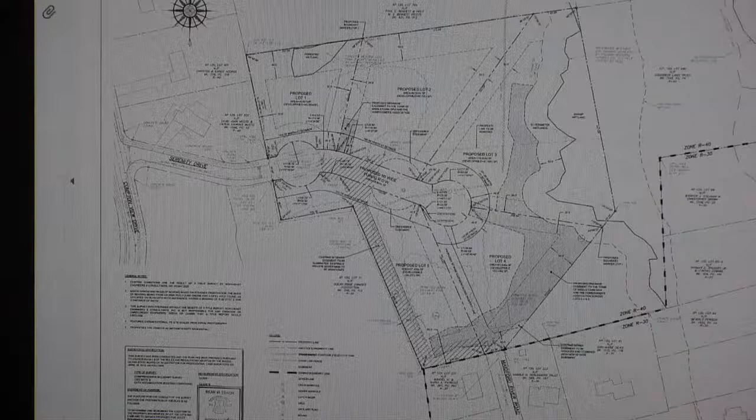Then we have a 200-foot setback, shown as the tighter dashed area east of the subdivision. Then it's probably about 100 feet to the property line, another 100 feet to the edge of the wetland, and another 50 feet to the edge of the perimeter wetland where the project actually starts. So it's pretty conservative to say we're about 400 to 450 feet away from the Maidford River.

And obviously you've taken that into account as part of the stormwater management design for the entire subdivision, correct? Correct.

In designing the stormwater management for the entire subdivision, you made certain assumptions regarding what the impervious area would be for each lot. Is that right? Correct. Can you just go through that analysis with the board?

So that we can try to provide a stormwater system that meets the overall development of the project while you don't have the final house designs for each of the 5 lots, the final layout for each of the 5 lots. Those would all be reviewed when they get their building permit under that process. But we do have to make an assumption on how much area those lots might be developed with.

For this project, we've allocated 3,000 square feet of impervious area for each of those lots. Now, that is usually the footprint. So that's a really large footprint because most houses are 2 stories. And that's impervious area, not decking or pervious patios or pools. It's, you know, if you want to put in a 1,500 square foot footprint and a driveway that's paved in 1,500 square feet, that would be impervious.

We do have the design calculations allocating 3,000 square feet of impervious area plus stone driveways. So there's some extra space in those stormwater calculations. When each homeowner goes to pull their building permit, we will be able to make sure that they comply with the overall drainage design for the project.

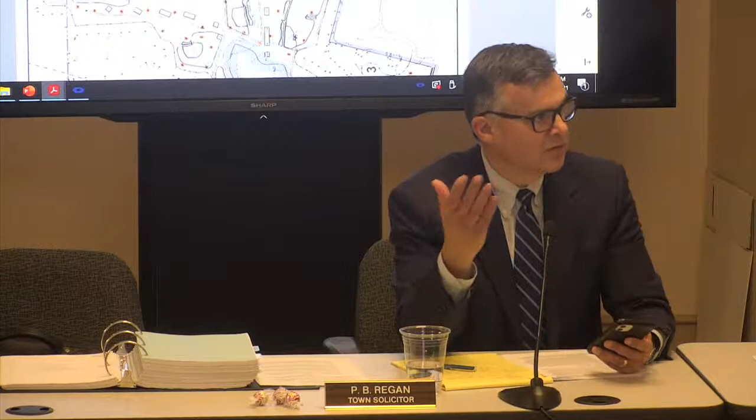If we just continue it to January 12th, we have to wait until then before we could assign a special meeting date. You can vet that date and hopefully confirm it in advance, but whatever special meeting you have would have to be after the 12th. In other words, you could confirm it's the 13th or the 15th or whatever date everyone's available, but it looks like it would have to be after the 12th in order to meet all the requirements.

So if I understand what the solicitor is suggesting, we put it over to the 12th for control purposes? Yeah, and then hopefully determine a date in the interim. That'll give Ron an opportunity to speak to everyone about an available date.

Well, perhaps another way around that is if we do it at a regular meeting and come in at 5 o'clock, adjust our time a little bit. I mean, that's not unusual, it's been done before.

Are you speaking for the board? Yeah, honestly we can deal with how we handle it between now and then. It's a good point, but now we should just continue it to the 12th.

I'm sorry, I didn't get that, Mr. Chairman. For now, we should continue this to the meeting of January 12th. And then the board, working with Ron, will arrive at a date to address this project, whether it's earlier in the evening of the 12th or some other date. We'll get it done as quickly as we can.

Well, I think as a matter of public notice, if you're going to meet earlier than 6 o'clock, that has to be decided tonight. So the public will hear that.

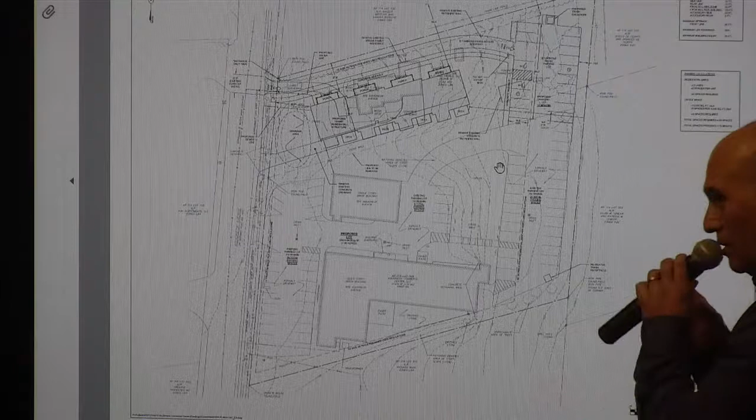Is it working? Yes, it is. Okay, thank you. I think so. Should I sing or no?

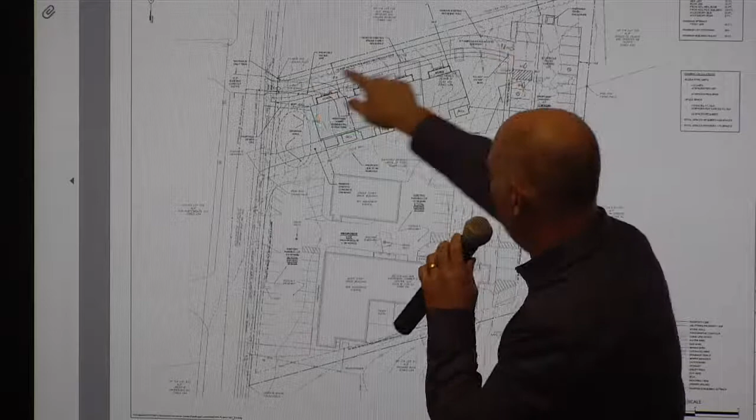So developing the site, we have a lot of issues with Aquidneck Ave, so we felt eliminating the southernmost access point would be beneficial, and having a one-way northern access point. In doing so, the road does encroach on the 20-foot buffer, leaving 5 feet the way it's designed today. So we have a 5-foot vegetated buffer where we'll plant giant arborvitaes, which will come through the landscape plan we'll present during TRC. In addition, we've sent an email to the abutter saying we're more than willing to put a 6-foot wooden fence along there in addition to the vegetation buffer.

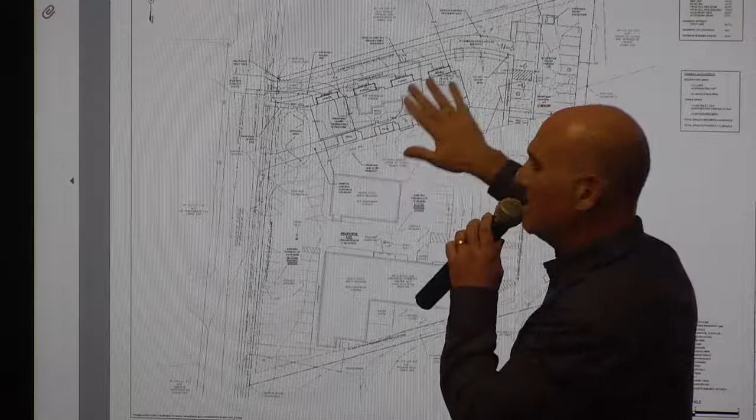This road, the building is angled this way for a very specific reason - because we have a large grove of pine trees right here and a stone wall going this way. So we've used the natural contours of the lot to achieve the site plan. That does put us approximately 63 feet from the nearest residential/business unit. It is a residential use, so we are mindful of that, and that's the second variance. The third variance, the height, is just - the building is never more than 35 feet above the topsoil.

The only reason it rises to 39 feet is because of the slope of the land and the way the calculation's done. But the building itself is never more than 35 feet above the ground. So it's just a result of the slope, not a result of us designing the building higher than 35 feet. So when we looked at the alternatives, we can move the building this way and be 100 feet away from the residential unit, sliding the road this way.

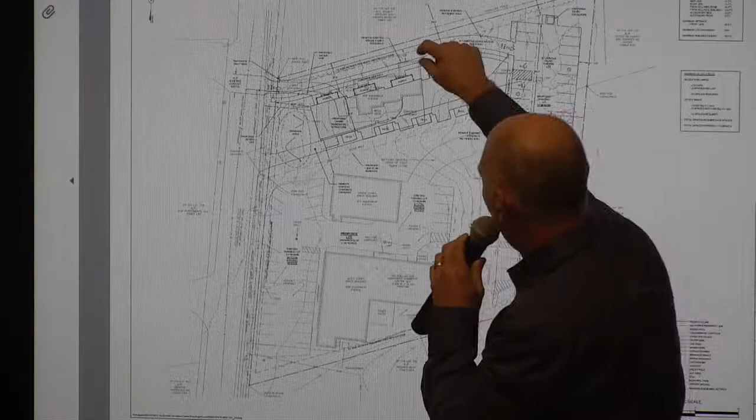What will happen is we lose the stone wall. It does not face the public right of way, so we'll have to replace it somewhere. We'll find a place for it. We lose all the tree lines, and we'd lose this second access. Right now there's a loop in the property, and the fire department felt that was a good solution so they could get up this way and down this way. By widening this road, it would be in and out, but we'd lose the loop transportation system we have.

If we move the building this way, we'll be 100 feet away, closer to this building, and we can move the road that way, so that is feasible. The height variance is the one thing that's impossible to really construct without elongating the building and losing its dimensions because of the slope. We'd have to excavate and make it — that's where we are on the site. So that's the three variances.

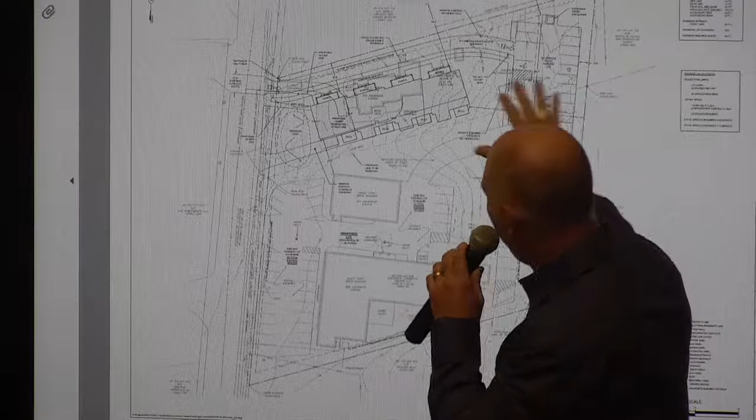It seems to me if you move the building to achieve the 100-foot separation, you could still establish that circular flow that TRC likes. Well, I don't know, and I don't believe we will. If we even come this way a little bit more, I don't think we get the 100 feet, Chairman. I think we'd have to tilt the building all the way so it's almost perpendicular to achieve the 100 feet. We might get 80 feet, 79, maybe 90, but we'd still need a variance. We can get 100 if we just move it this way and be compliant without a variance.

And then we have to slide the road over, because we need it positioned to get it far enough behind, but still have a walkway in — we need to get people into the building. So we'd really have to slide it over and lose this circular path.

Thank you. Comments or questions?

Chris, as long as you want to speak to the issue of the flat roof on the building. Sure, I know, Chairman, how you feel about flat roofs. We were going for a design that kind of worked more as a campus. A campus — do we have a picture of the building?

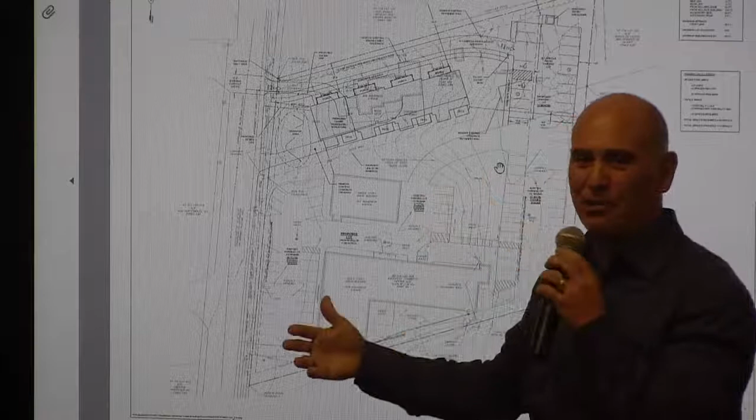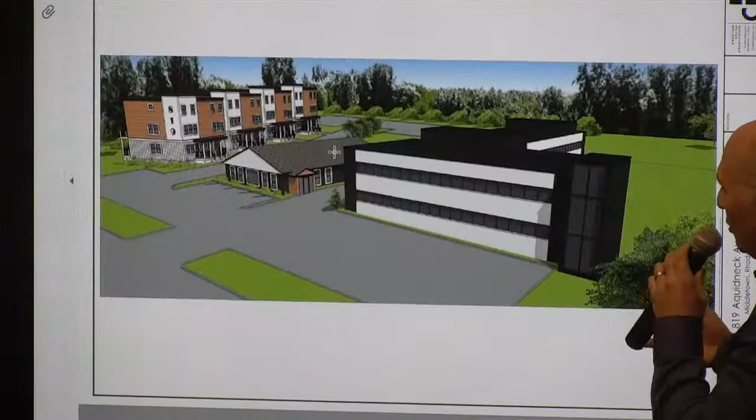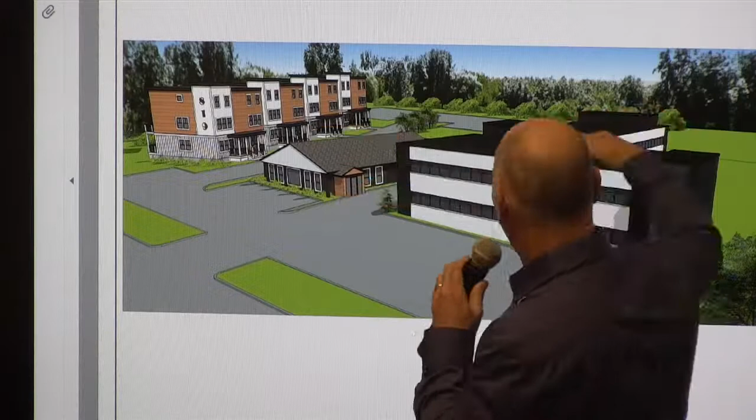So most importantly, even if you bear with us and allow the flat roof situation, there will be no mechanicals on the flat roof. The flat roof kind of fits with the way the buildings are positioned and the way the landscaping works. We were looking for more of a contemporary coastal feel, trying to fit the commercial atmosphere of Aquidneck Ave, really trying to present that campus feel. It's really a personal opinion kind of selection. I do understand where you're coming from — we just felt it really looks nice laid out. That's personal preference, I guess.

Are you going to change the colors of the siding on that commercial building on the right? This has already been changed — I don't know if you've driven by. We've changed it to a dovetail gray, so the white's gone and it's all been changed. The siding's all been put on the building if you drive by. It looks really nice. You don't have the most recent drawings up here, Ron, but we have new drawings of the updated siding and everything.

The same color as the siding on the apartment building? Yes, exactly, so it all looks the same. It's actually not this red — it's a little more, it's already been done, a matter of fact, if you drive by. So this has all been completed, and then all this would match together.

Other comments or questions? Bill? Question, yeah, thanks. Ron, as I read your memo, he talked about zoning relief.

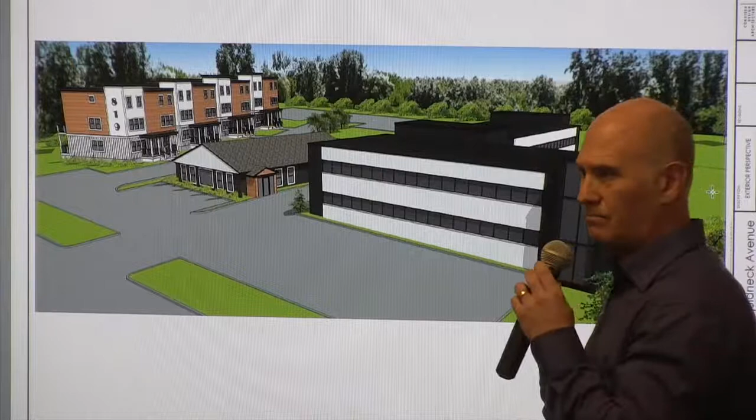If we have to go to the 100 feet, we have to put the stone wall down. Understood. So if I want to support keeping the stone wall and give you the 62 feet, my question is: has the fire department acknowledged there's going to be a stone wall potentially hindering their access there? Oh no, the stone wall's already here, it doesn't impede their access at all.

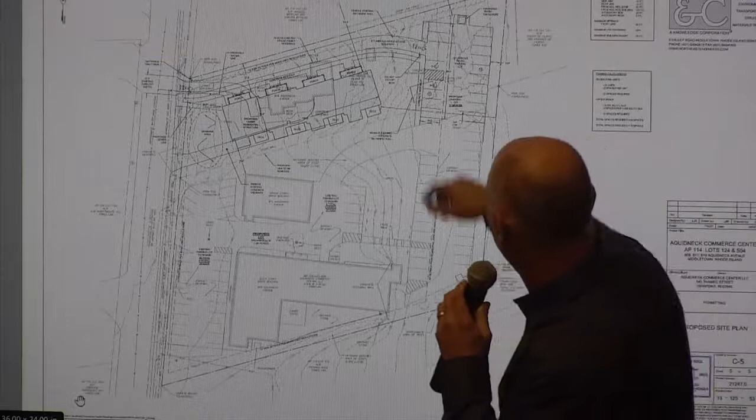I understand that, but along the back side of that property, if they needed to get a vehicle in there... Oh, there's no stone wall back here. No, I know. I'm talking about behind the building on the south side. Yes, right here, they're aware of it. That's close to the structure, and typically if the fire department needs to get access there, that stone wall potentially could hinder access for fire.

So I just want to be clear: we've reviewed this site plan during roads and utilities, and the fire department was there. Their one comment was they've asked us to just remove a space over here so they can turn. Okay, okay, okay.

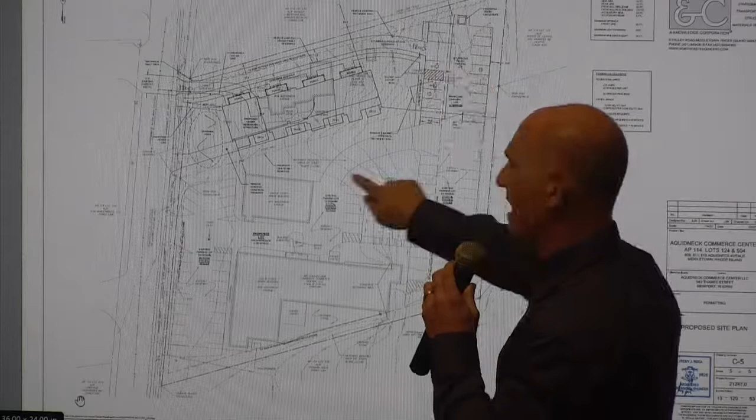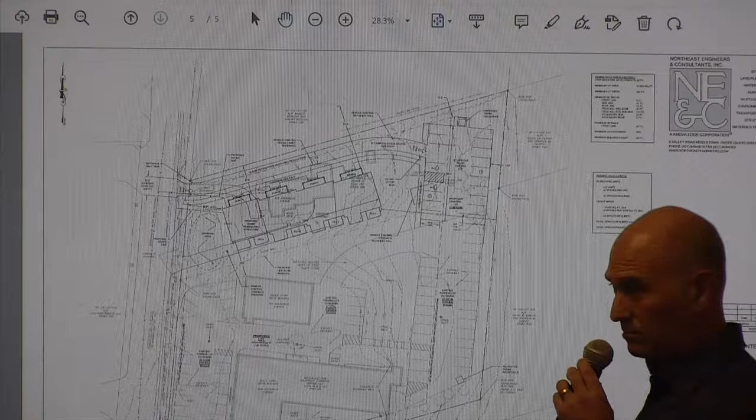What is the building that is 62 feet from your building? This building right here. Yeah, but what is that building? That is a single-family home. It's a single-family home with a business too, a landscaping business. There's a single-family home there that also incorporates a landscaping business at the site. It's not purely single-family.

Other comments or questions about the waiver? Mike and then Art. So on the north end there, where you have that 5-foot buffer, what is that? We have the way the road's laid out at 5 feet, and then there'll be a landscape and a wooden fence that goes all the way up. So I'm looking at these architectural drawings, it looks like maybe a tall hedge or some arborvitae's. Yeah, the arborvitae's, correct, giant arborvitae's, they'll grow somewhere around 15 to 20 feet high, pretty fast growing.

Well, I think, if you're going uphill, what are you going to do? I think we're at like 161 and it goes all the way down to 140. But the building itself never goes above 35 feet. It's clearly just a slope.

Do we need to go through these potential waiver requests one by one? You can go through them one by one if you want. But before you do that, I have another question. Your perspective drawings show windows on the ends of the buildings, but your plan drawings do not show the windows on the ends. What is your...

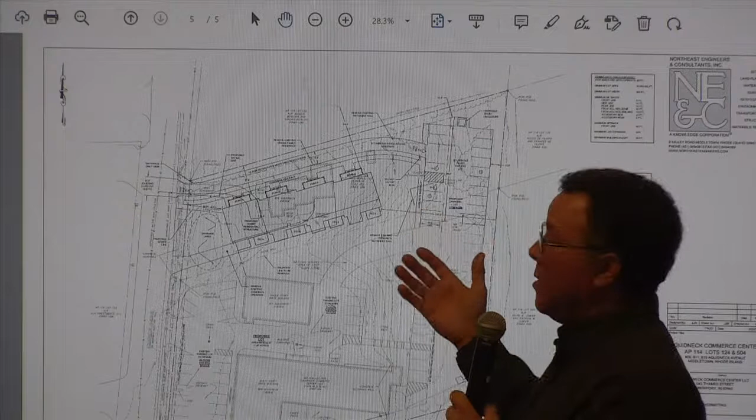We do have grandkids that play back there, so my issue is, even though it's a one-way, you'll have trucks, UPS, FedEx and all them in and out. They don't drive like 5, 10 miles an hour when they're in this zone. So I'm worried about cars leaving the property or coming in, sliding into our property on a snowy day or something. If somebody's not paying attention, it's only a 5-foot buffer. A 20-foot driveway in the buffer doesn't make sense to me.

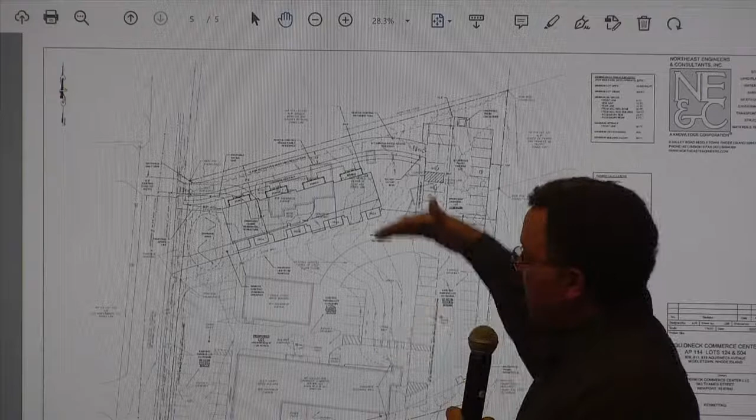I think Chris is trying to, in some way, alleviate this by making a greater distance, which, hey, I'll be all for it. But we do have concerns because we use that side of our property for our own use.

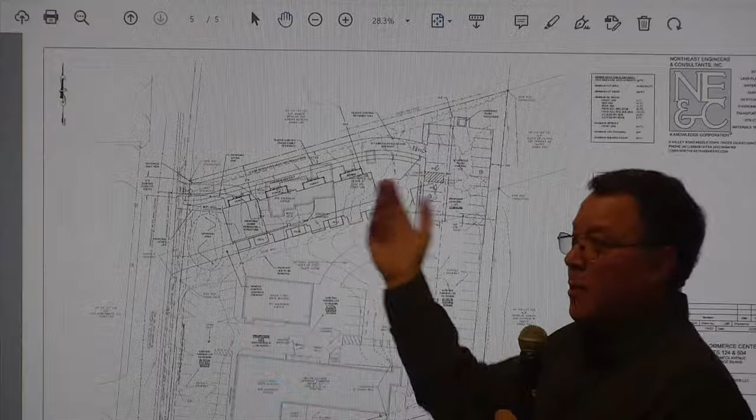Your concern is that some of those vehicles might encroach on your property? Well, it's not the encroaching, it's if they're coming around — I don't know which way this is coming up, but it's always something on Aquidneck Ave. I brought it up once before, but vehicles run off the road, pulling up into a parking lot from across the street. So yes, it makes me very nervous. This is 5 feet from my property, not 50 feet from my property. And it's a big concern.

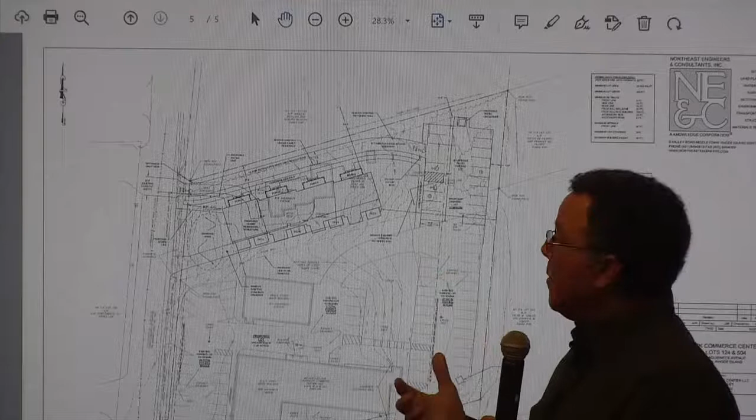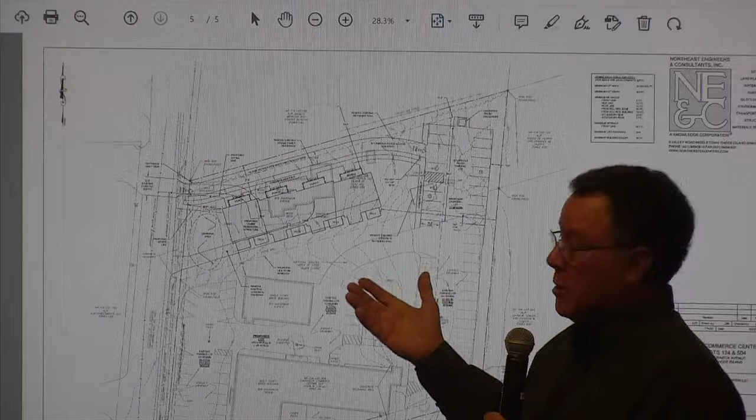I think Chris, like I said, was trying to give it some other way of making it work. If you can make it work, great. The distance, you can push that road over a little bit, great. But this is just, to me, too close. And then that 5-foot buffer, at some point, maybe it doesn't work on the plan. Does it become smaller? Does it become 2 feet? It's supposed to be 20 feet, but you got a road in it — that's not really a buffer as far as I'm concerned. So ultimately, I think he was trying to give some other way of making this work, which we get, and I understand it. I just don't want the road so close. I'm calling it a road, you guys call it a driveway, but 18 feet wide and over 150 feet long — most driveways aren't that long, unless you live out in the country somewhere.

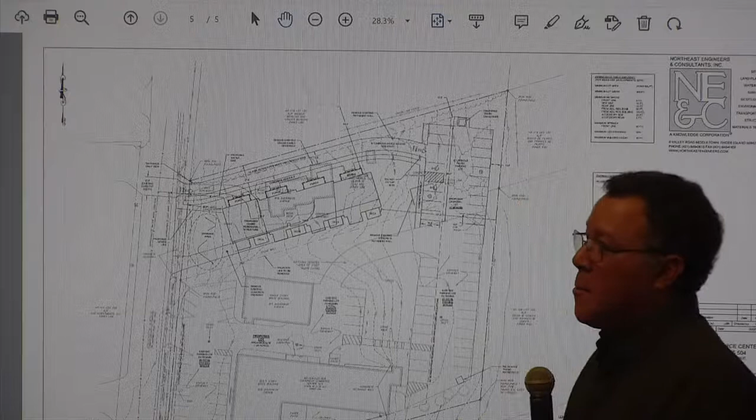BJ, do you have a question? Yes, I have a question for you. Do you have any fencing along that side of your property? I have fencing that goes all the way — chain link, on this side of the property. What kind of fencing? Chain link. How tall? 6 foot. That meets code for the pool.

So the pool is that close? Pool is approximately maybe 15 feet away from that fence. And mind you, the fence is, depending on the area, could be 4 to 6 feet from the property line.

Would any shrubs or vegetation help you at all put along that side of the fence? I know, he's planning on it, but the problem is we put it kind of small right now. So take a truck, snap a pole in half, put vegetation.

I'm not complaining about the vegetation he wants to put in. I'm just complaining about the road that's going in. It's too close to the property line. The buffer ultimately is 5 feet now. You put a road in it, it's no longer a buffer.

What do you think of the project? Get rid of the house, it's great, you know what I mean? What he's doing is really good. I'm not complaining about what he's doing as far as the project goes. I'm just complaining about the road being so close.

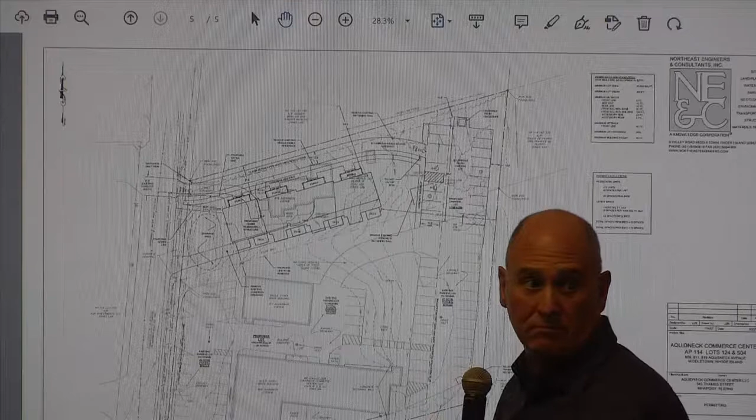Absolutely. Would that work? To stop the cars from coming into our yard, for protection, if it stops vehicles, because our kids play back there, we just put bollards in there, that's all. Yeah, that's fine. Could you do that? Oh yeah, that's not a problem. That would be great.

We also had a question, because we have a well in our backyard, and drainage was going on too, so I didn't know if that would affect our well with the building. That should have been addressed, shouldn't it? I think Lynn, the engineer, can speak to that. Let's hear about surface water.

Could I just ask a question? Just so we can get this clear, is it a 10-foot buffer with bollards, or a 15-foot buffer with bollards, or do you want the full 20 feet, or 10 or 15? We want as far away as we can get. Okay, so we'll just do 20 and not ask for the variance at the end of the day.

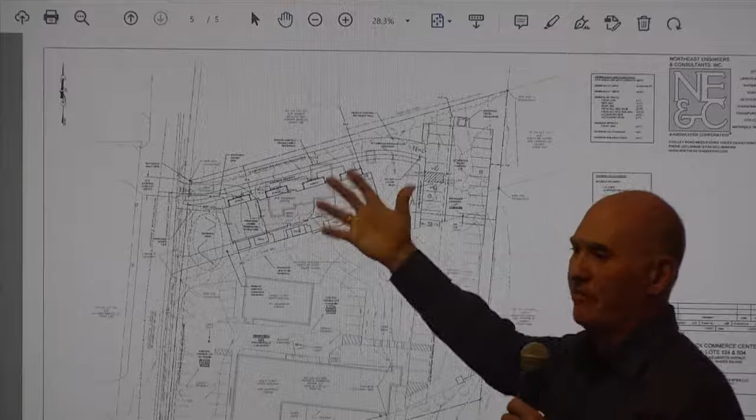Then we'll lose the stone wall. Then we'll lose the stone wall and the trees. We'll still have to reorient the building in order to move that, and you'll have to relocate the stone wall. Yeah, we will have to relocate the stone wall.

So what happens then to the circular traffic pattern? That would have to go away. There's just no way we can move this way without ending up all the way over here if we get 20 feet off here. So if we can move it that way, we will.

We'll have to have Chris do a 10-foot buffer though. Yeah, still keep the basic. Well, 10 feet, we can just slide this over 10 feet. We have 22 feet between the corner. And you'd still lose the wall. We're still going to lose the wall against it.

So here the question would be, you're asking him to relocate the wall. No, if he has to move the wall because of a condition we impose or a requirement, if there's a wall on the property, he's bound by our regulations to relocate it somewhere on that property. So just asking, could he relocate it between the two properties?

That's kind of where I was going to go. That's an idea. I mean, that's almost like a car barrier in itself. That's where I was going to go with you.

Yeah, that's an idea. The other thing I wanted to ask Chris is, currently the way the plan is, the road as it exists on the plan I'm looking at, how far is it away from the property line now? Looks like 5 feet, right?

So that's a concern, and I happen to agree. I think that's close. I think 10 feet is reasonable. If you can get him 10 feet and put that wall over there, to me it's a win-win for everybody here. 10 feet buffer, not 5.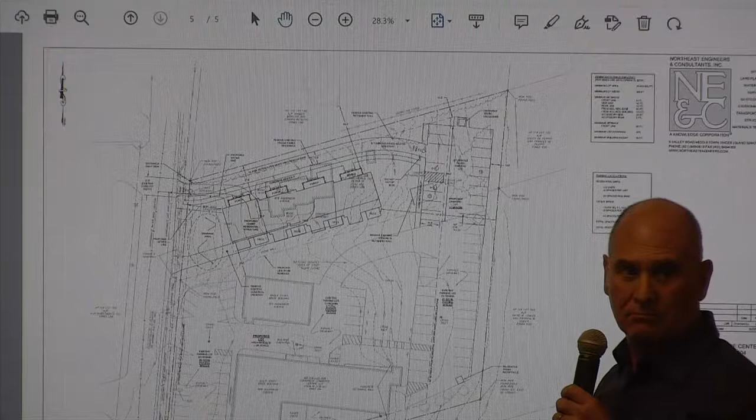No, but they don't have to put a speed bump in, because if they're out there plowing. You're a plower. I don't want to hear it. You're a plower, you know what I mean, like 2 o'clock in the morning.

Let me ask a question. Given that the applicant is willing to make some changes, would this have to come back for review again? The best thing here would be to continue this to the next meeting, and in the meantime you could talk to each other.

Get approval just contingent on us having a 10-foot buffer? Where was that?

Well, technically, the relief that has been requested and advertised is for 5 foot. So if you're now asking for less relief because you're providing a 10-foot buffer, then from a legal standpoint it doesn't need to be re-advertised or re-noticed. The question is whether the board is comfortable enough with what the reconfiguration is going to look like to be able to proceed to make a decision. So then that's really up to the board.

Sounds good, yeah, I'm good. I think the board is fine with the configuration, so long as we can capture it in writing somehow. And the only other thing would be, in terms of conditions, because you do have the right to put conditions on any zoning variances you're granting, if there's going to be any reconfiguration of the road, one condition might be that there'd be another review by the fire department to make sure they're sure.

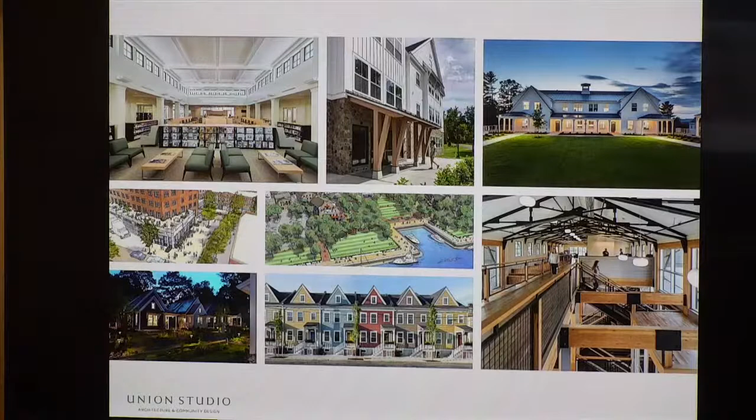Union Studio was established with one overriding goal: to use our skills as architects and urban designers to make a civic contribution to all communities of all types. What that means is we're very mission-based, really dedicated to enrich lives and strengthen communities. Whether it's affordable housing, planning, good developer housing, the Tiverton Library up on the upper left-hand side, student housing, and even on the lower right, WaterRower headquarters in Warren, which is a corporate headquarters. So whatever project comes through the door, we put the community, our clients, and people first.

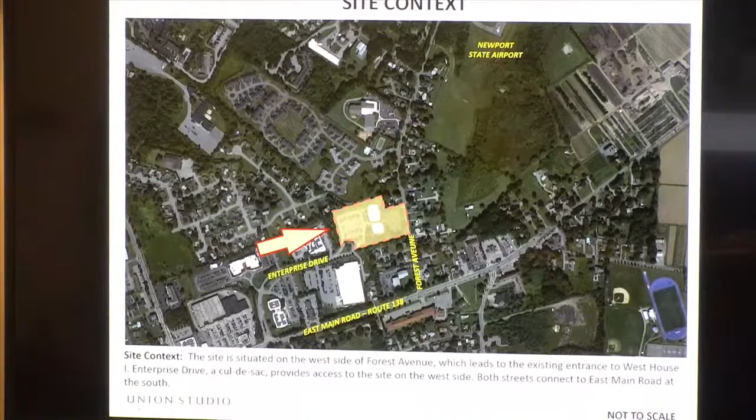I'd like to go through the existing conditions briefly. You probably know the site very well, it's a couple hundred yards behind your backs, on the end of Enterprise Drive on the west side, and the frontage is on Forest Avenue on the east side. It's a large parcel, and as Mr. Belden mentioned earlier, it was developed years ago as part of an office park, and in the late 90s the existing building was converted into elderly affordable housing.

Looking specifically at the site, the frontage along Forest Avenue is the main entrance to the existing building, with a parking field in front of the front door on the east side. On the west side is a large parking lot that was considered for office use, and Mr. Belden has confirmed there's very little parking used by the residents currently at West House 1.

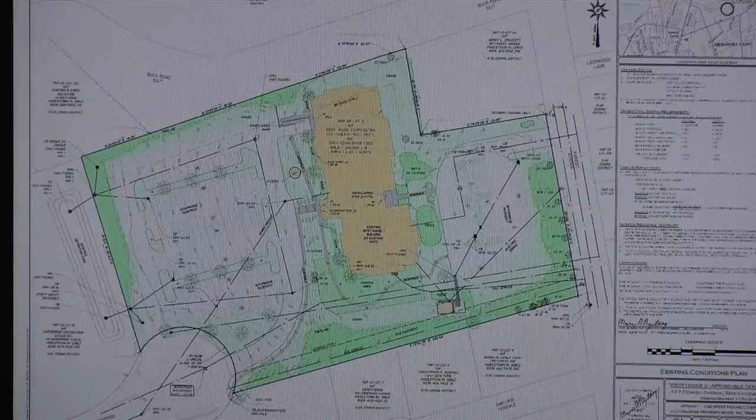What I'd like to point out, which is hard to see from this slide, is that the east part of the site is much higher in grade than the western side. From the west facade of the existing building, it's a steady slope down away from the building toward Enterprise Drive. That's significant architecturally, because the finished floor level of the existing building needs to be considered for this addition and for connecting interior circulation from the existing building to the new addition. It's not really a building, it's technically an addition.

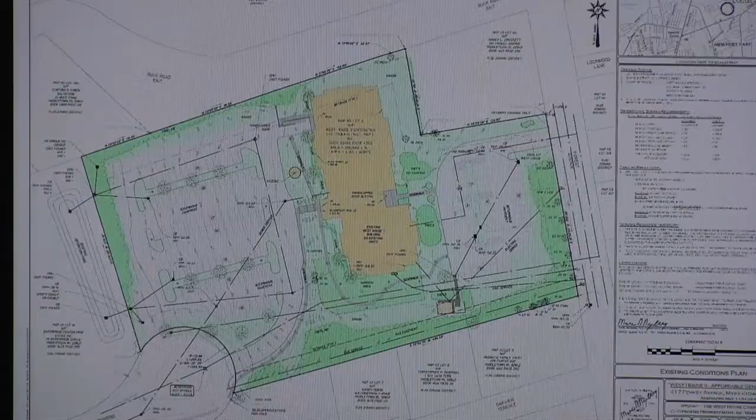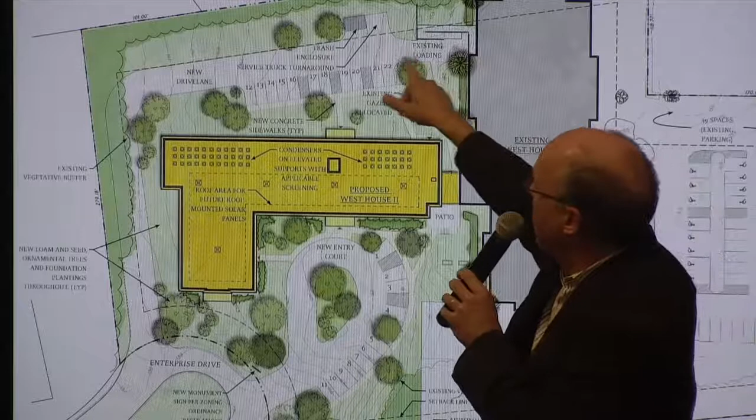We played around with a lot of configurations, and this direct east-west access was determined to be most suitable for the parking and site circulation, but also to provide unobstructed views for the existing residents toward the west. Because of the sloping site, this building is set down lower than the existing building.

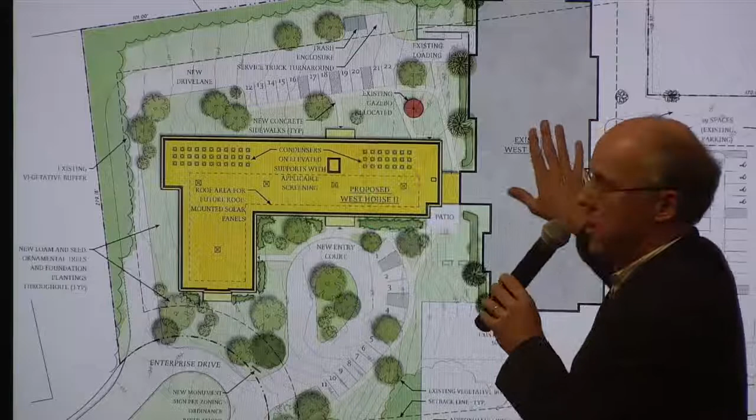Our civil engineer will go through some more details of the site planning. Next, please.

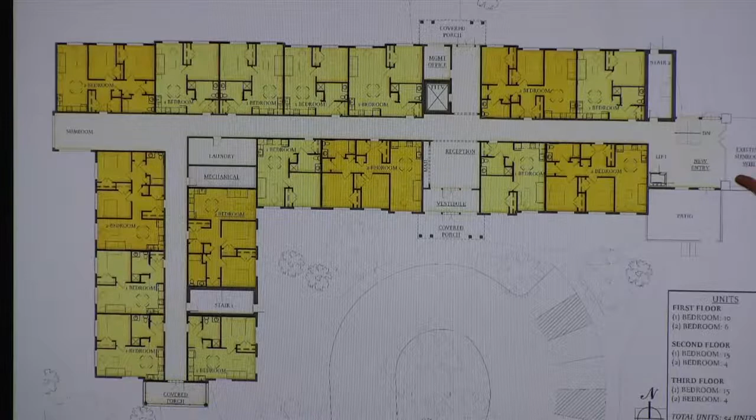There's an existing sunroom on the first floor that we will be connecting to with a new entrance and a south patio to provide some nice southern exposure seating outside. That's connected to an existing garden up high on the south side of the existing building. But then that is our transition area, where we have steps down about 5.5 feet from the existing finished floor elevation down to the first floor elevation of the new building.

Next, please. Not much to add on the second and third floor plans. And then I'd like to jump to the elevations, the proposed elevations.

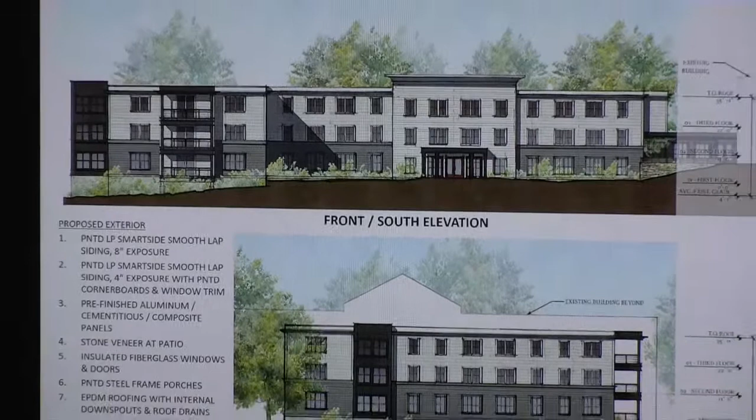It is a flat roof. There's a few reasons for that, as I mentioned before. One is to minimize the obstruction of views to the west toward the Newport Bridge, or the Claiborne Pell Bridge now. I still can't help it, it's still Newport Bridge to me. The flat roof will also have some condensing units, as well as a future solar array to help provide power to the new addition.

I know there's been some comments about why isn't there a pitched roof. As you can see, there's a little bit of a pitched roof on the existing part of the building beyond, but that was an addition made when it was converted to housing, to create a central atrium to bring light into the front entry foyer. Also, there's a 2-story manager's apartment, so they have the benefit of a top story for a bedroom there. So it's only a little part of that building, designed as an architectural element to provide sunlight to the main foyer.

So can I ask a quick question? Yeah, please. Where do you hide the heating and cooling stuff?

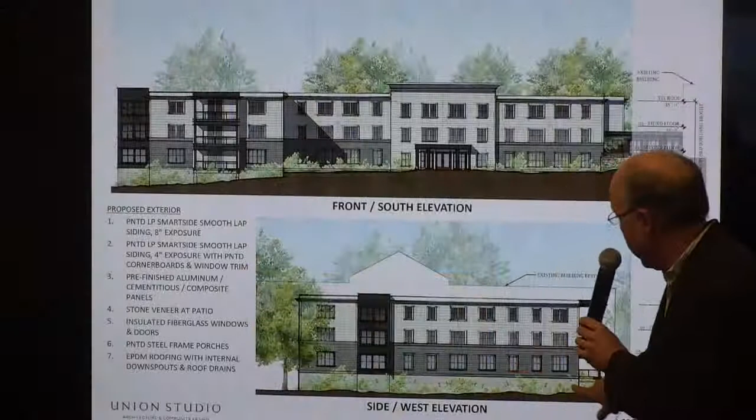Well, we are proposing, which is not in your plans but we've developed a bit more, a partial basement. So a lot of the mechanical and electrical will be in the basement. If this is the west elevation, facing Enterprise Drive, this is now sort of a walkout basement, and our basement access will be on that side.

Okay, thanks. Next, please. This here's the north elevation, very similar to the south elevation. Next.

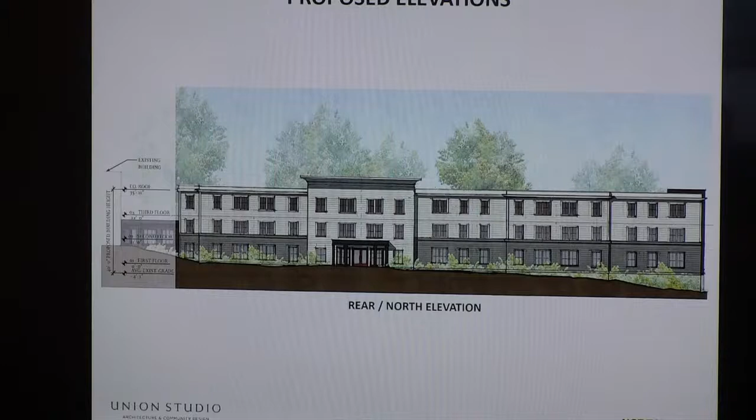We are proposing some very traditional type materials. The siding is a cementitious or composite siding, which is to mimic clapboard siding, but it'll be painted. It's very useful in terms of maintenance and cost, easy to maintain, easy to paint, and it looks very traditional. We have some painted steel frame porches for the front entry area and the porch on the south side of the L wing, and we're proposing some stone veneer on that raised patio.

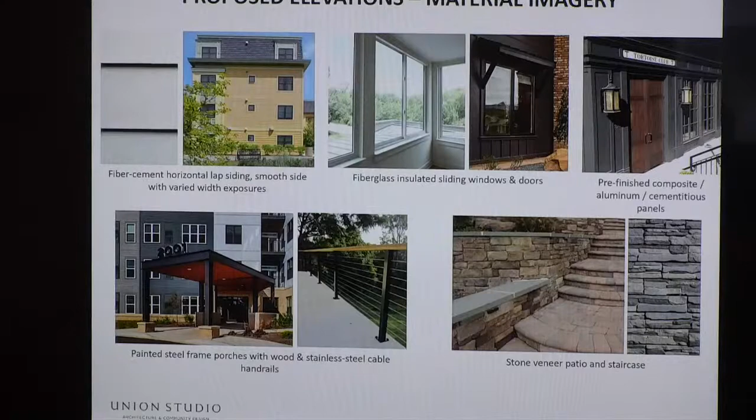Nothing out of the ordinary. Well, I could add that - I'm sorry? If I see another flat roof, I think I'm going to jump off it.

But we have been fighting a battle here for about 100 years to make things look somewhat interesting and like it's New England. And I always encourage, if there's any wiggle room to make it look unflat or a little bit different, a little gable or something like that, I personally would appreciate it, and I think everybody else would, because quite frankly, when you look at a flat building, it could be a prison. I think it could be more interesting if we got some kind of a roof variation. I'm not sure what it might be, because I'm not an architect, but I'm just hoping maybe that we can do something that's a little bit more interesting.

Okay, we'll take that into consideration. Yep, because I say that all the time. 99% of the time, nothing happens, but maybe I'll get lucky. You might have to live in that prison someday. Yeah, 50-50, 50-50. Careful what you wish for, kid. Next, please.

I'd briefly like to just walk you through some of the variances and waivers that we're requesting. Next - it's just an arrow.

As Mr. Gerard mentioned earlier, the first one is the use variance that we're requesting. That is affordable senior housing here on this site, which is an office district zone.

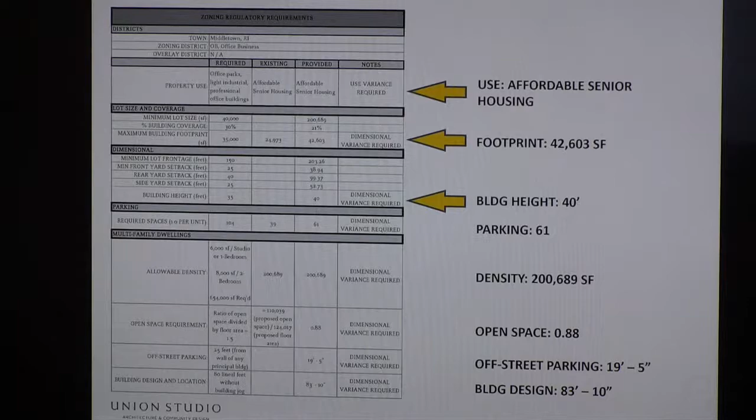And then the building height, although 35 feet is required, we took a conservative approach and measured the existing grade from the addition, and recognizing that so much of the building is not attached to the existing building, our building height, if you measure from the average existing grade of the addition, would result in a building height of 40 feet. However, if we take the entire building, both the existing and the new, the calculus of an average existing grade is actually 31 foot 4 inches, and therefore we're under the allowable limit. I want to point that out, that rather than not apply for the waiver and tell you we're only 31 feet tall from average grade, when at actual grade for this new phase we're at 40, although I think we could get away with it, we'd rather present that height waiver to you so that it's transparent.

But we do think that you could look at this as the 31-foot height and it not be required. We just wanted to explain that on a couple of these waivers, we've taken the conservative viewpoint to make the request. We would like those waivers to be granted, although there might be some arguments that exist for why they might not be necessary.

Thank you. The next one is parking, where 104 spaces are required for both West House 1 and West House 2 for a multifamily building. There's 39 existing spaces, and we're proposing more for a total of 61, which is under the required threshold. But I think the reason for that is that this is senior housing, and I'll have some documentation in a few minutes to show what the real needs are for senior housing within the Church Community Housing portfolio projects, that the average is well under the required amount by the zoning ordinance.

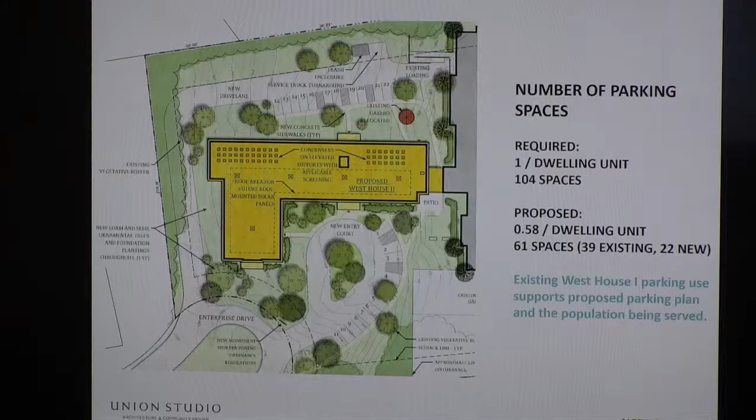So before you leave that, you're putting solar panels on the new building as well. Will they be shielded from view from the ground? The building is high enough because the grade along Enterprise Drive continues to drop down, so you have the advantage that the panels will be higher up. They'll be set back a minimum distance from the edge of the building. Well, the ordinance has a requirement for shielding, and you should make sure you're meeting that requirement.

Okay, thank you, we'll take that. You can use some nice roof design options to do that. Yeah, yep, thank you.

I already covered the request for parking, but here are some more details of what we're proposing, which is essentially 0.58 spaces per dwelling unit. Next slide, please.

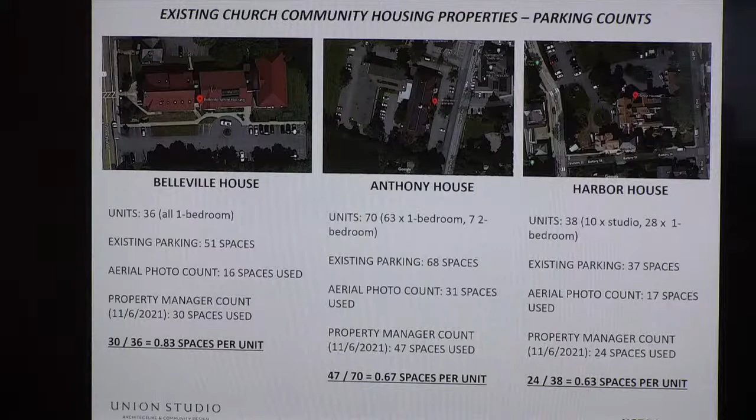And then the next slide shows more projects that really illustrate the real need for parking in these sorts of projects. At the very far right, West House, the proposed figure is 0.58. Next.

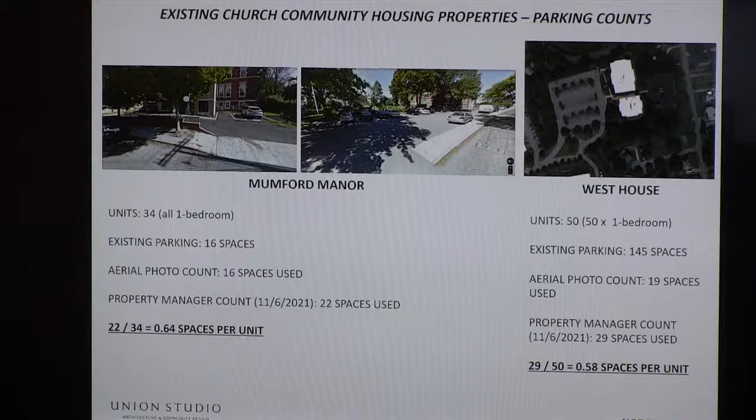What's on the left side there? I noticed something that's not flat. What's that little thing, how'd that happen? That little gray thing on the left-hand side of that building there. This here? Yeah, holy cow. It's a parapet with a curved or angled cornice line. We've already solved that issue. Whoa, we're going the right direction, right? Merry Christmas, hey.

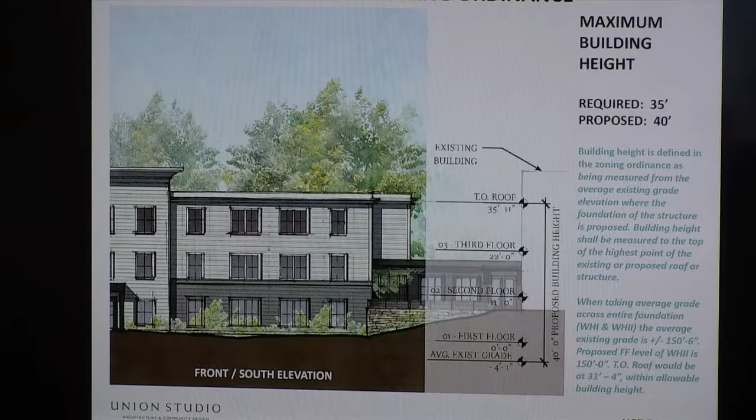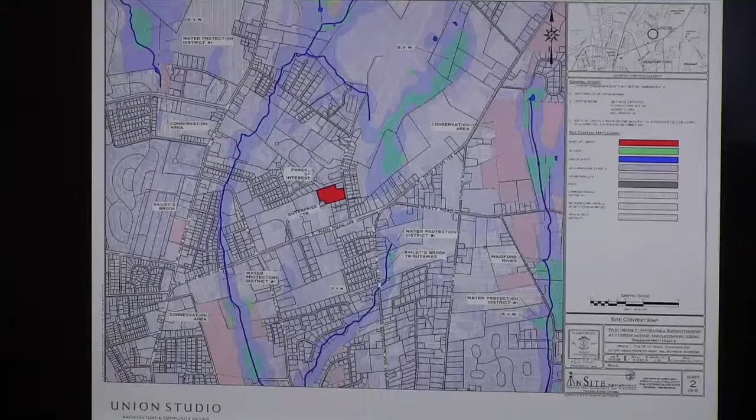And that concludes my presentation, and I'll hand it back to, yes, Galvin will call Louis Gentili. Thank you. We're in overtime, yeah.

So, Louis, you're here on behalf of InSite Engineering, correct? Correct. Please identify yourself first. Hi, my name is Louis Gentili, here on behalf of InSite Engineering. Now, the site plans that are part of the package and the project are under the stamp of Paul Carlson, who you work with at InSite, correct? Correct, I work under his supervision.

And he's a professional engineer. Yes. And you are a professional engineer in training. Correct. Can you explain your educational background, please? Sure. So in 2018, I graduated from Roger Williams University with a Bachelor's of Science in Engineering with a civil specialization. In 2019, I passed state certification to become a Rhode Island Certified Engineer in Training. After 4 years of working under a certified professional engineer, I will be eligible to take the PE exam and get my official stamp to become a professional engineer myself.

Okay, so Paul stamped these plans, but you work closely with Paul in the development of all of these plans, correct? Absolutely. And you're in a position to answer any of the board's questions tonight about any of the engineering or technical questions that they might have? Certainly. Okay, and before they might have any questions, I wanted to ask a couple of specific questions.

Item 5E, nothing has been received on that, is that correct? Right, we were working with the developer over the last few days to try to get the cost estimates finalized and to the town engineer for a recommendation. So we should continue this to January 12th? I don't have the recommendation from the town engineer yet, so yes, you should continue it.

Okay, so may I have a motion to continue item 5E to the January 12th meeting? Motion made, second, motion is made and seconded. Is there any discussion?

All those in favor say aye. Aye. Opposed, nay. The item is continued to the January 12th meeting.

Was there one person recused? Yes, Bill recused himself. Okay, the next item is item 4F.

Town council requests that the planning board research adopting an ordinance requiring Esplanade-style sidewalks. We have not yet received a draft, is that correct? We have the referral from the town council requesting...

No, wait, I'm sorry, I read the wrong one. Which item are you on? We're doing 4F, the Esplanade-style sidewalks. All right, I was on 5F.

Okay, that's the solicitor, yes. Nothing has yet been received. Continue this to January.

May I have a motion to continue item 4F to the January 12th meeting? Motion made, second. Motion's made and seconded.